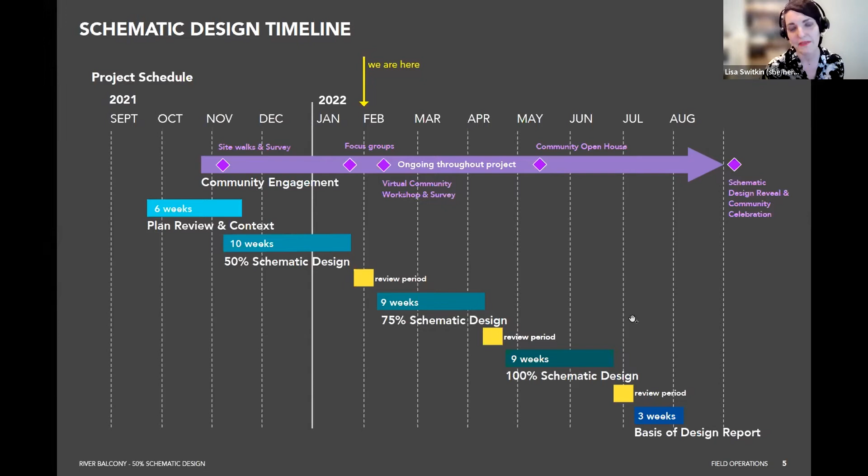In terms of outreach and engagement, which is of course essential in every project, I did want to recognize our engagement team led by 106 Group, and Regine Kennedy and her team is here tonight. Claim Our Space, Katie Battistroyer and her team as well. Katie's also here tonight, you will see her a little bit later.

Forecast Public Art with Jen Krava and her team. And we're also working with Sam Obelson, who's the Great River Passage Conservancy's tribal consultant. Sam is also here tonight helping as a facilitator. Sam is actually looking at the riverfront holistically, as well as how the river balcony fits into the larger picture.

The community engagement plan, in summary, we're really trying to engage in multiple ways, formats, and forums. This includes technical advisory and stakeholder committees, and we recently hosted a series of focus groups with historically underrepresented populations, including Hmong, Somali, Black, and Latinx Hispanic communities.

We are going to have a series of community workshops. Tonight is our first one, the next one in May, and another in the early fall. We've been doing a series of surveys. The first one went out in November - some of you may have participated, so thank you for your feedback. We'll be doing a second one in the coming days, and part of the breakout groups tonight is actually kind of taking that second survey.

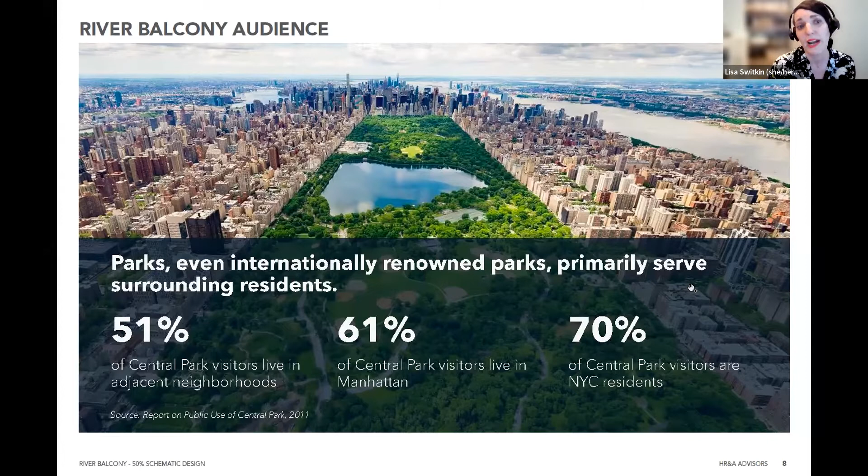The first finding is that parks, even the ones thought of as iconic tourist destinations, primarily serve their residents - the adjacent neighborhoods and the wider cities and metros they serve. Most parks don't have the resources to collect this data, but even Central Park shows over half of visitors are from adjacent neighborhoods, with much of the rest being New York City residents. So first and foremost, parks serve residents.

The next piece is some initial demographics about the analysis of St. Paul and what this means for St. Paul. St. Paul is growing, attracting a highly educated younger population, but also families, older adults, as well as immigrants.

HR&A looked at 3 areas within the downtown area: the downtown core, with an increasing number of families who tend to be white, relatively affluent and well-educated, as well as diverse communities surrounding the core. To the north, there's a growing number of African-American and East African immigrants, as well as a substantial Southeast Asian population, specifically the Hmong community. To the south, a significant population of Hispanic Latinx residents, in addition to a growing number of Asian residents.

So all of that is really to say that while local residents may be the most frequent visitors, the river balcony will also serve a diverse group across the region, as well as these adjacent neighborhoods. With initial analysis, HR&A estimates 2.9 million annual visits, the majority of whom will be local, for the river balcony. This is taken from annual number of visits from various visitor groups who shared their demographics with us, as well as benchmarked against other regional parks in the area.

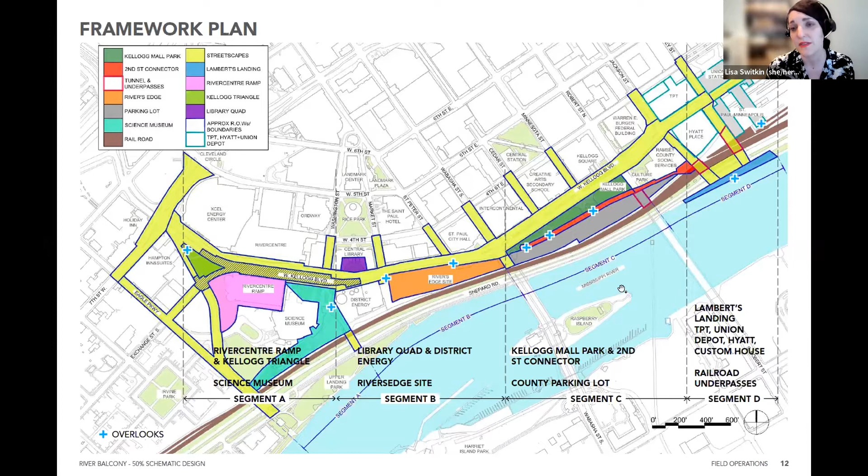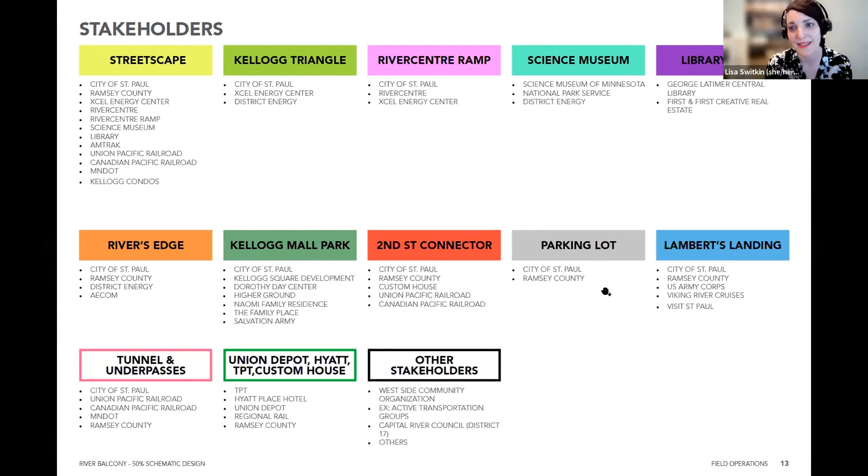So the framework plan really defines the river balcony site by identifying all of these pieces, along with the relevant stakeholders who will participate in determining the physical footprint, alignment, character, programming, and operations of the river balcony. We see this as a living document - we've tried to capture all of these different groups here. Definitely let us know if you feel like there's anyone missing who should be part of this initiative.

All of this led to a series of overarching principles. The first one is really the most fundamental one, which is build on what is already here. We were really surprised and captivated by the amount of existing infrastructure already on the site, and started to think about ways we could strategically reuse and reimagine that infrastructure, versus all of the heroics and gymnastics of trying to create new bridges and decks and things like this.

The second was establishing critical connections. This means both to the river, but also back into downtown through the city streets, those different view corridors, as well as physical connections.

To create discrete and distinctive elements. So it may not be fully continuous, the river balcony, but we want it to be recognizable, like a string of pearls, that actually become the river balcony itself.

Prolonging and extending the stay. This is really about getting people to linger and stay downtown and not just come for one thing and leave. Fostering programmatic extensions and synergies. There are a lot of really great institutions here, whether it's the Science Museum or the public library, et cetera, and really building off of the missions and the different things that all of those institutions bring to the project, and getting people downtown as they do.

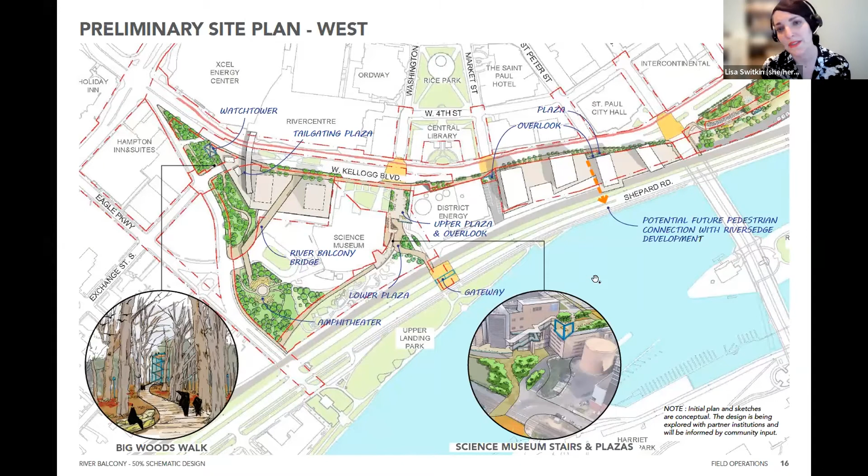The primary features include a series of overlooks, kind of like a string of pearls. They really draw you in from the city, and they're visible from the river as well. There's a series of features along the way, from the Big Woods Walk to the west, a new Bluff Walk, reimagined Kellogg Mall Park, and the 2nd Street connector as you move to the east. There's an enlivened Lambert's Landing at the water's edge all the way to the east.

So all of this is together, but it's a lot to take in as one piece. So Sanjukta is going to join now, and she will walk you through each of the spaces in more detail. Sanjukta.

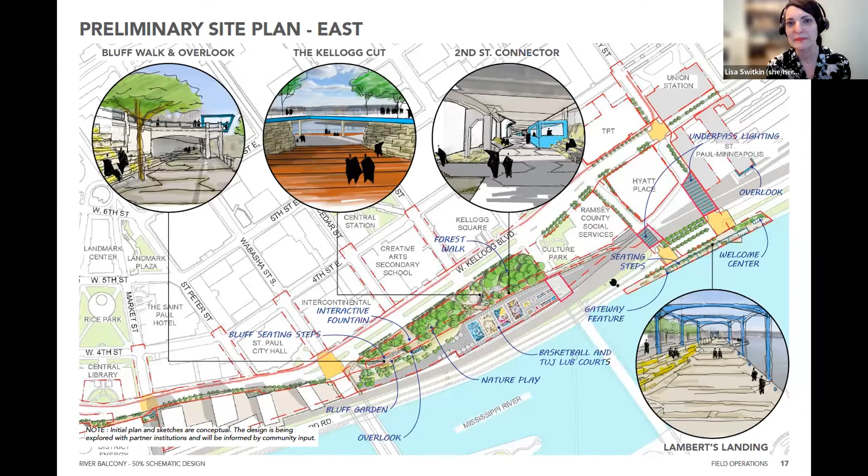All right, everyone, we'll take a little walk on this 1.5 miles. We'll do it quickly. I'm sure it'll actually take longer to walk once it's all done, but we'll try to go with this in like 10, 15 minutes.

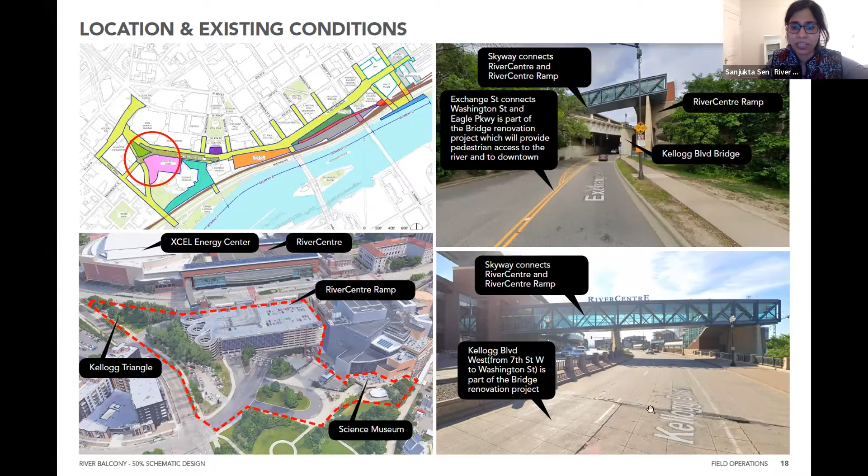As Lisa mentioned, we'll start at the western anchor of the project. This is the assemblage of sites that front the Xcel Energy Center, RiverCentre, the future RiverCentre ramp project, and also coming down topographically to the Science Museum grounds down to the river with Eagle Parkway along one edge. We really see this as an amazing opportunity to create a symbol of the Minnesota ecoregion that Lisa spoke of.

It's really one of our opportunities to create a beautiful planted environment, sort of a big woods walk that acts as a trail and leads you down from Kellogg to the Science Museum grounds, dovetailing with some of their educational and public-facing programming, such as an amphitheater, and tying into future development, which we'll coordinate on with city agencies, potentially looking at alternate ADA access from up above Kellogg down to the river, complementing other access points that are there.

These, as Lisa mentioned previously, are fairly diagrammatic. They'll move around as we coordinate with various groups. But this is really to signal an intention of bringing people down, connecting people from up above at the Kellogg Boulevard level down to the river.

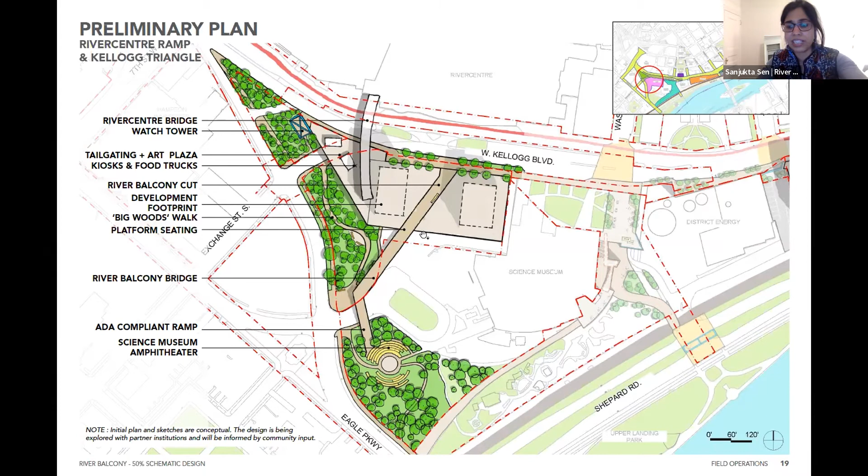At the Big Woods Walk, the idea is to complement some of the energy of the Xcel Center and RiverCentre and provide spill-out zones during game days potentially. Hopefully some of that fun can come out here, and then really bring in these ecological elements that we can start seeing here.

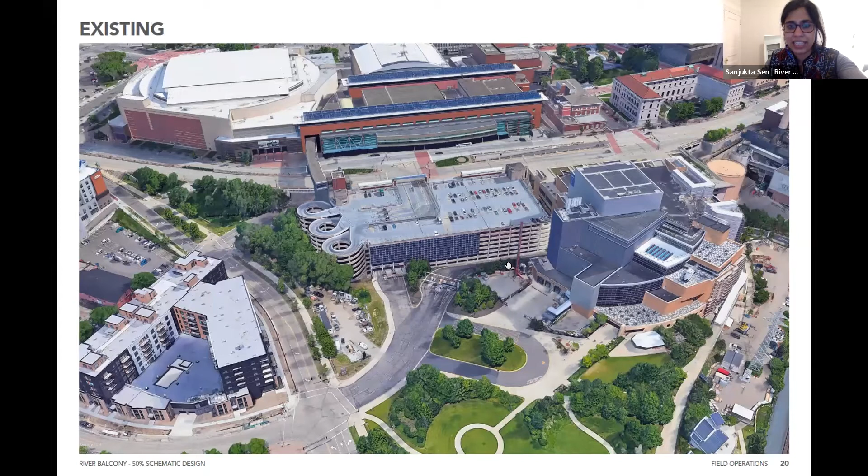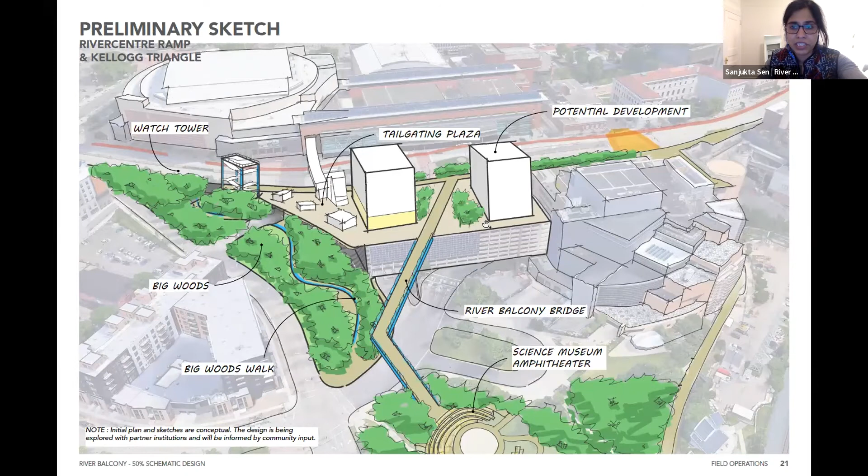This shows the existing assemblage of sites as it is today, and what it could be at a high-level massing, where you see the Big Woods Walk winding down to the Science Museum grounds, and how potential development on the site can bridge over the sites.

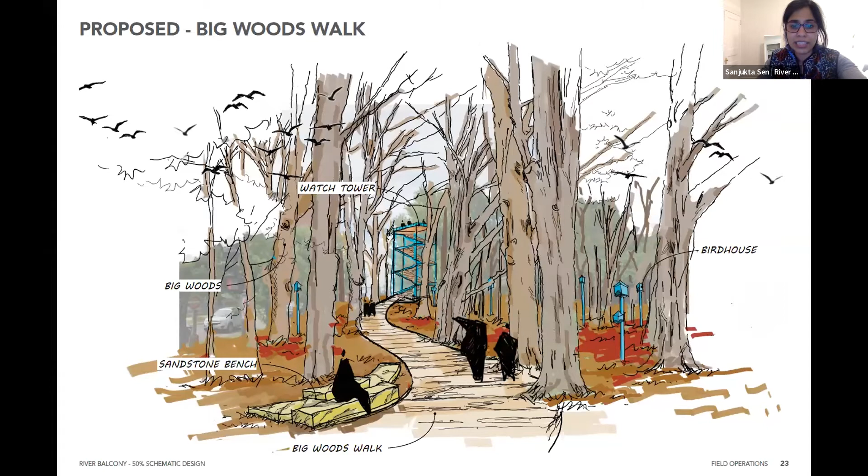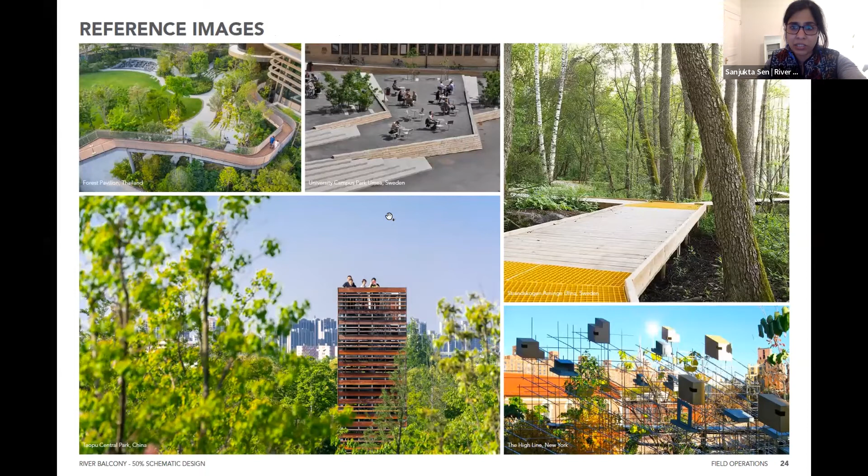Some reference images point to what these spaces and elements can be, the elements that can be integrated into the topography and some of the new development that comes along.

Moving on, walking east to the location of the Science Museum, and this interesting bridge at Washington Street that brings you all the way from the interior of the city to Rice Park, a cultural hub with the Ordway and other institutions around, with the library on its edge as well.

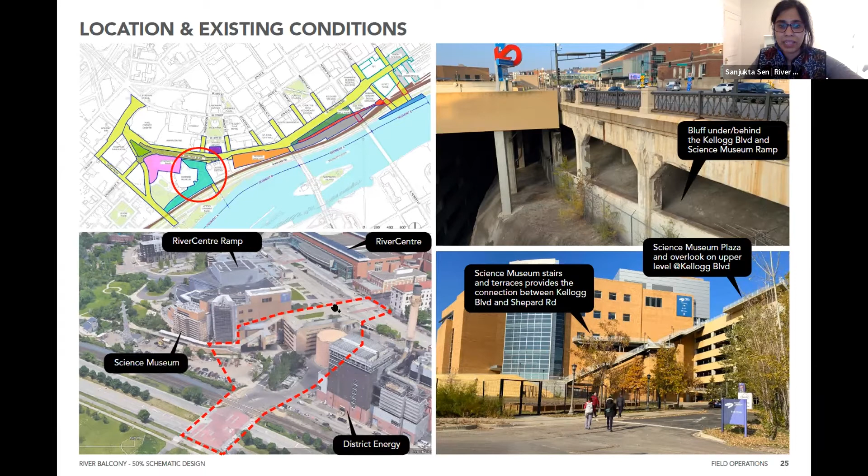We see this dashed red line as almost like a carpet that brings you down from the city above to the river. As Lisa was saying, we were struck by how many of the pieces are already there and just need emphasis to point users, pedestrians, and visitors in this area to the fact that you can easily go up and down. They just need that layer of accessibility, design, and emphasis to point you to those locations.

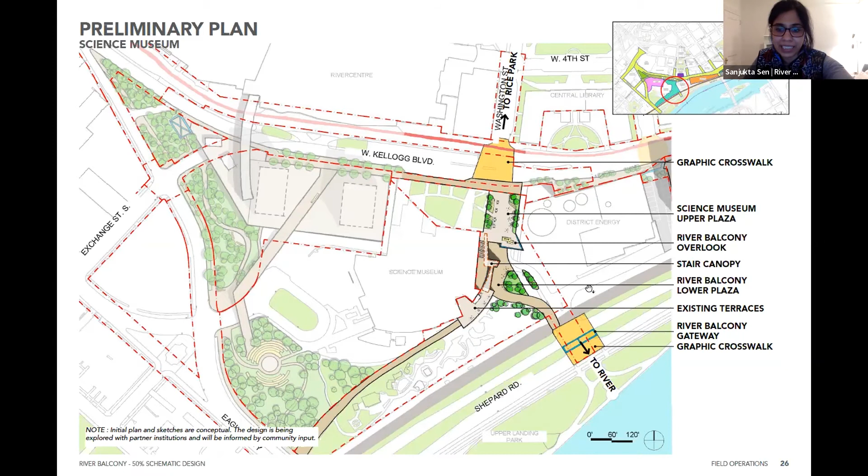This is a site plan showing how to transect that distance along Washington with an improved plaza to the Science Museum grounds. We're working closely with the folks at the museum, who have been super supportive of these ideas, looking at potentially using some of the infrastructure and tying it in as part of the river balcony identity to signal that crossover from the city to the river.

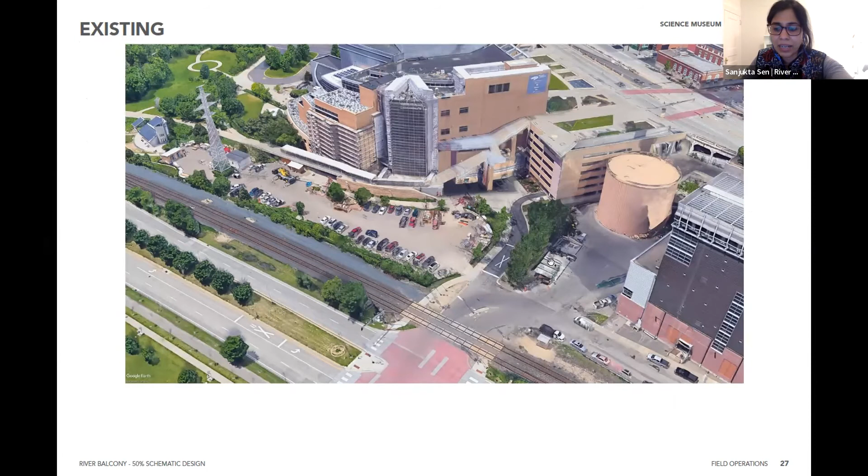Look at what exists today with this existing staircase that comes down with district energy right next to it. The transformation looks at improving some of those connections via simple tools like graphic crosswalks and legibly planted zones, really pointing people and orienting them to that connection, and also to the larger institutional presence of the Science Museum itself.

Just one thing to add - if you go back to the sketch, most of these sketches are meant to show an intention. The overlook isn't designed yet, and this idea of a river balcony gateway along Shepard isn't designed yet either. That'll happen in the next phase. But there are intentions about these different ways that could bring legibility as well as wayfinding, to allow people to know that the river balcony is there.

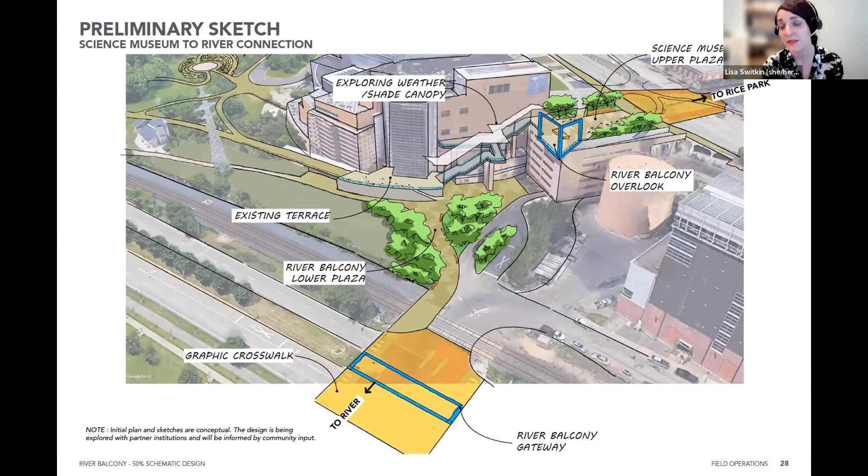In some of our discussions, this idea about Shepard and those types of gateways along the road, as well as on the bluff, also came up as something to think about and consider. Great, thanks Lisa. And then some precedent imagery about what some of these elements, such as the overlooks and the connections, could look like as they connect the upper level at Kellogg down to the river via the Science Museum.

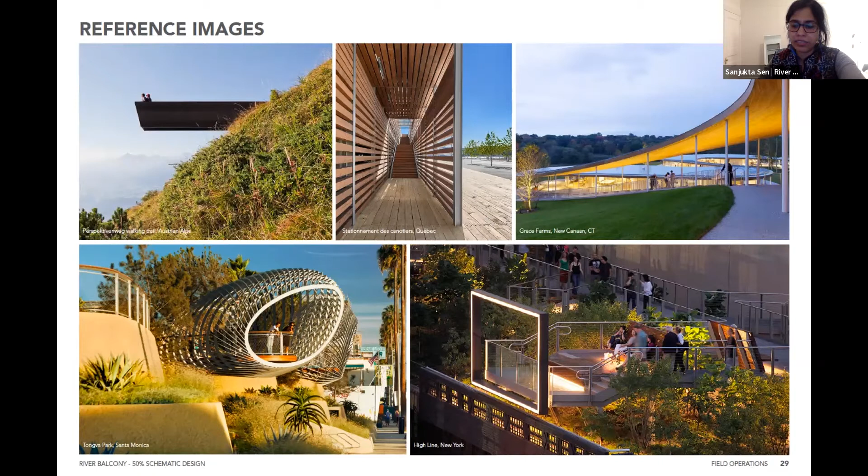Marching further east, we get to the river's edge site. Some of you might be familiar with this - it used to be the site of the old county jail, and currently it's slated for development. We are working closely with the county and with the designers to come up with potential programmatic strategies that are being thought of for the river balcony that might work themselves into how the river balcony places itself adjacent to this site.

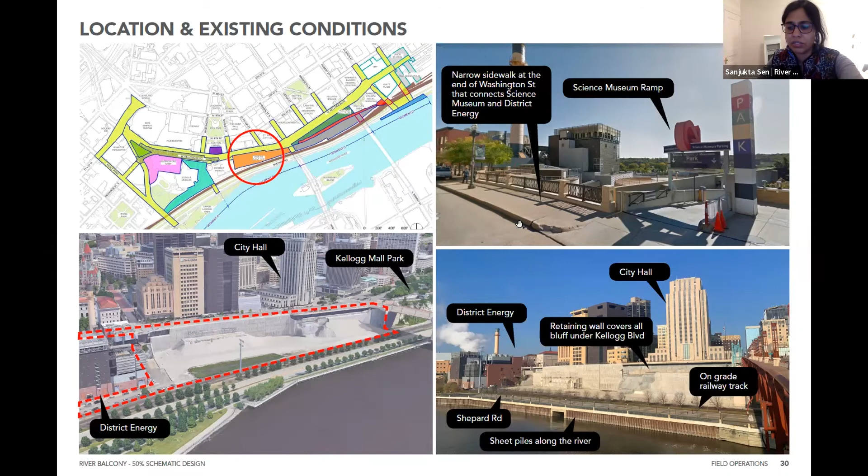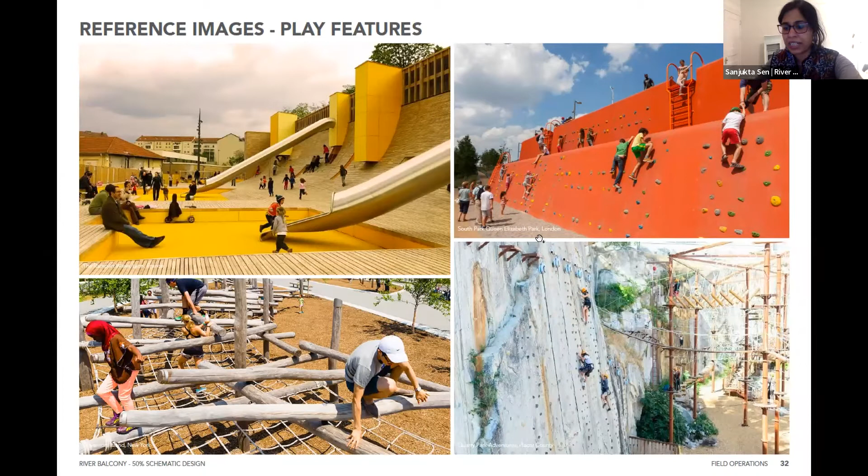Some of the potential ideas that might find a place in the future river's edge site take advantage of the location of the site and also the interesting vertical difference that the upper level and the lower level provide, and also other ideas for activation that might draw people to the site in the near and the long term.

Moving further east, we get to the heart of the site, which consists of Kellogg Park, the East Second Connector, and also the county parking lot at the lower level. We really see this as a really interesting nexus of the project for four reasons. It's possibly the last remnant of the bluff in downtown St. Paul, and therefore a really key place to continue experiencing it and appreciate its geological beauty.

Secondly, Kellogg Park itself is a really great destination. It offers awesome views of the river and across the river, and has an amazing set of mature trees that can really leverage amazing programming down below.

East 2nd Street, to us, was a really interesting space. It was almost an existing connection down from up above. That lower left image, I think, is very telling - you can kind of tell from this image what that condition is.

Even though it's currently slated for vehicular traffic, we found it to be fairly underutilized, and our hope is that we can visualize this as a pedestrian access - primarily pedestrian and bicycle access - that can connect Kellogg down to Shepard and then across to the water.

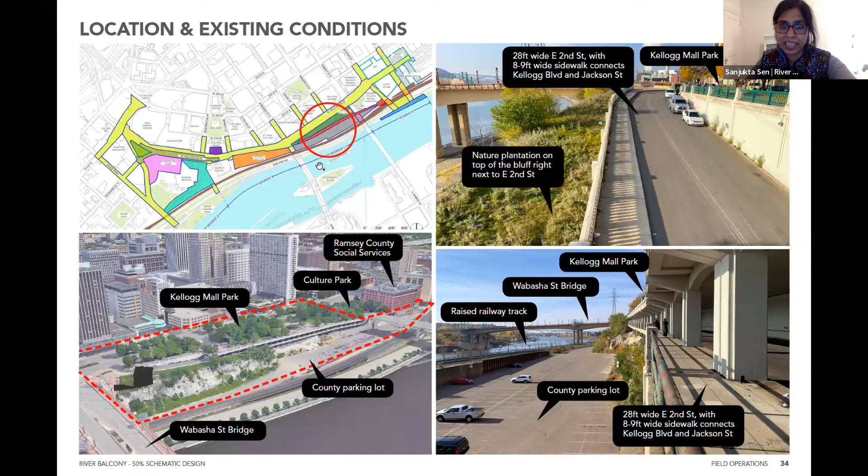The last interesting element here is that it is at the nexus of where Wabasha crosses over from across the river, making it a key point of access at the center point of the river balcony. So all of these together make this a really interesting and super key location for the river balcony itself.

A plan of the upper level of Kellogg Park uses the existing layer of trees and some of the really interesting water features that occur currently at the street ends, potentially making them interactive as a way to invite more participation in the space. And then leveraging the view at the Minnesota Street extension to emphasize that amazing vista you have at the center of this park.

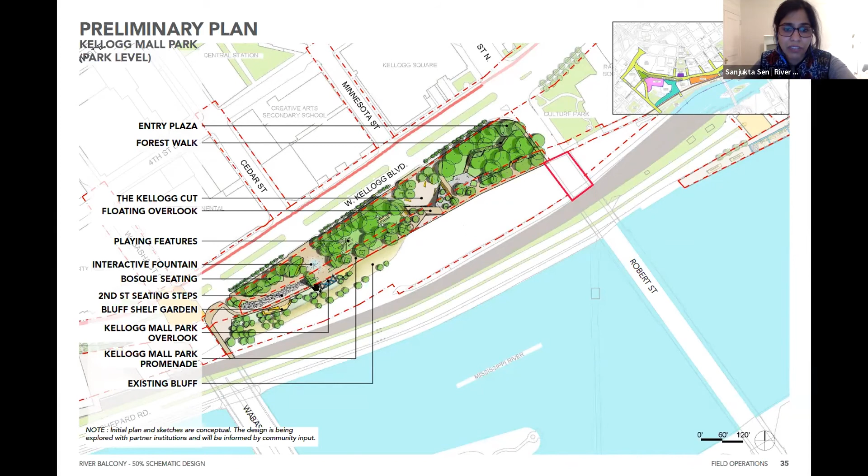At the knuckle of Wabasha Bridge, where it leads down to East 2nd, there's an idea of dissolving that harder upper level edge to create a descent down to the lower level onto the shelf of the bluff that exists there already.

This is the lower level park showing East 2nd Street. It's almost as though if you take the lid off of the street and took the park away, and we're walking down that East 2nd Street connector, we really see this as an activated second level of Kellogg Mall Park in some ways. Kellogg Mall Park is already a legible, known public space in downtown.

This could be a really amazing second level that is activated by kiosks, by installations, and potentially this idea of the bluff walk that really takes you down and helps you remember and experience the bluff at close quarters, where you can actually touch it, feel it, and be in it. It's also a really beautiful juxtaposition.

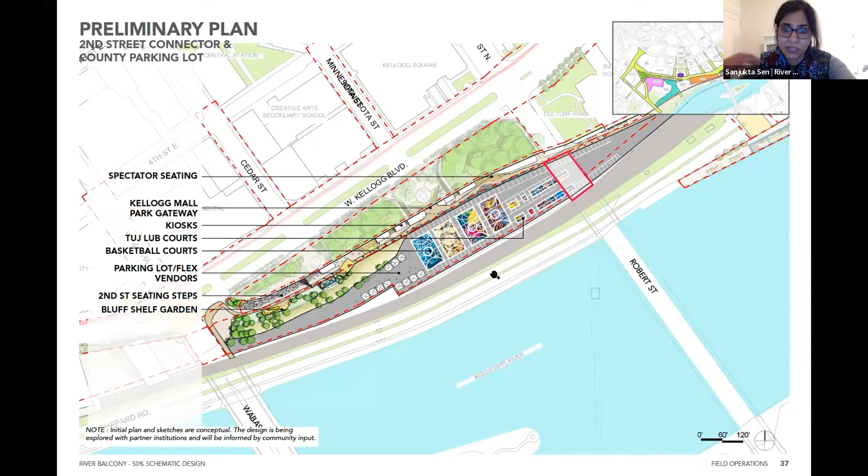As a really great way of revealing the bluff and what used to be there, the lower level, which is the parking lot, is something we see as a candidate for really interesting interim and temporary programs for weekend programming, potential courts, and specific games that are interesting for local communities.

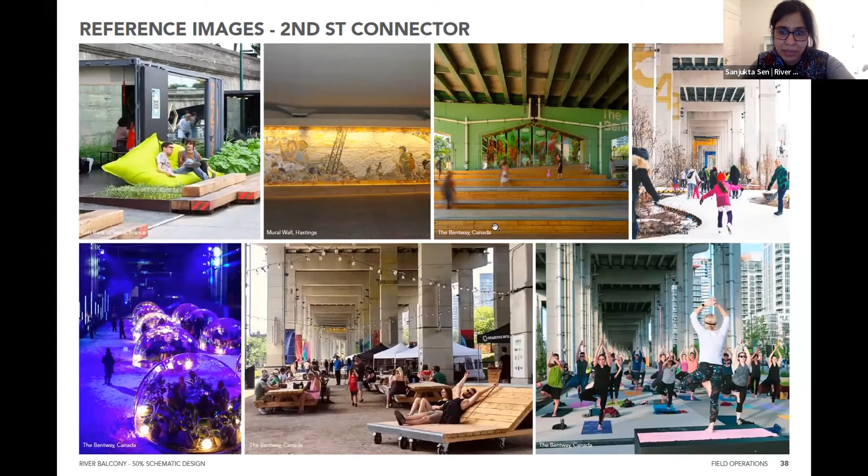Some examples of how these undercrofts and spaces are used in other cities. We are looking at these pretty closely for inspiration and precedents, along with examples of interim and temporary programming that could occur at the parking lot.

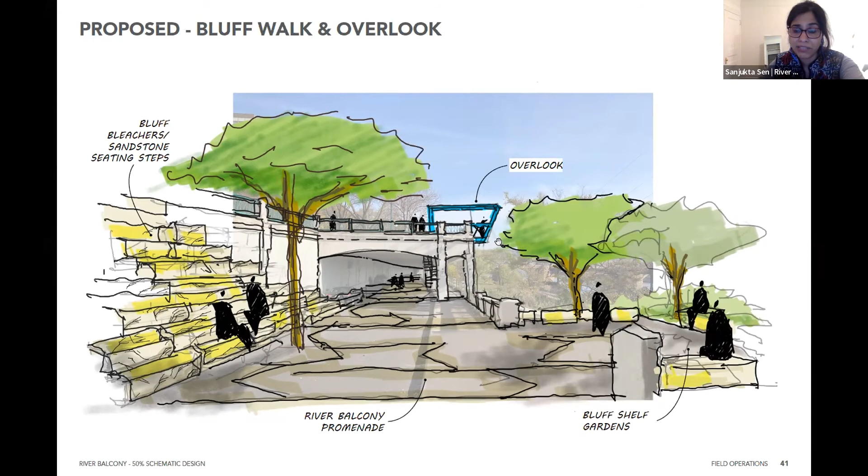These overlooks are proposed, as Lisa mentioned previously, as strategic locations to really enhance and focus the views, magnificent views out to the Mississippi. A view of what it's like to be inside East 2nd Street.

The idea is potentially bringing people down and revealing parts of the bluff, exposing parts of the bluff that might be behind this imposed infrastructure that has been carved through the bluff.

We do understand there might be some structural challenges at some of these locations. The idea is to certainly do this work selectively, by consulting with folks from Public Works and of course our very capable structural engineers.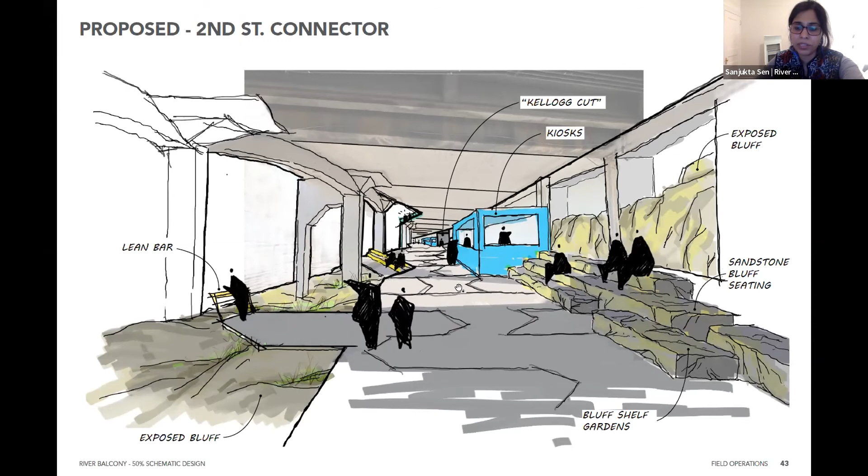But really it is to see where are the moments that we can actually see various facets of this bluff as it used to be in its former iteration.

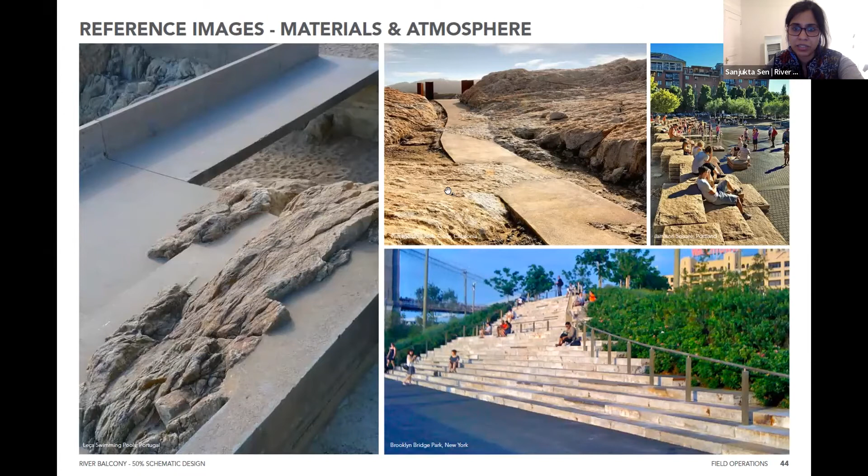Some examples of how materiality of this nature can exist together, the imposed concrete along with some of the naturally occurring stone. And then finally, the view that we are trying to really celebrate at the end of Minnesota Street by creating a cut down from the park level down to East 2nd.

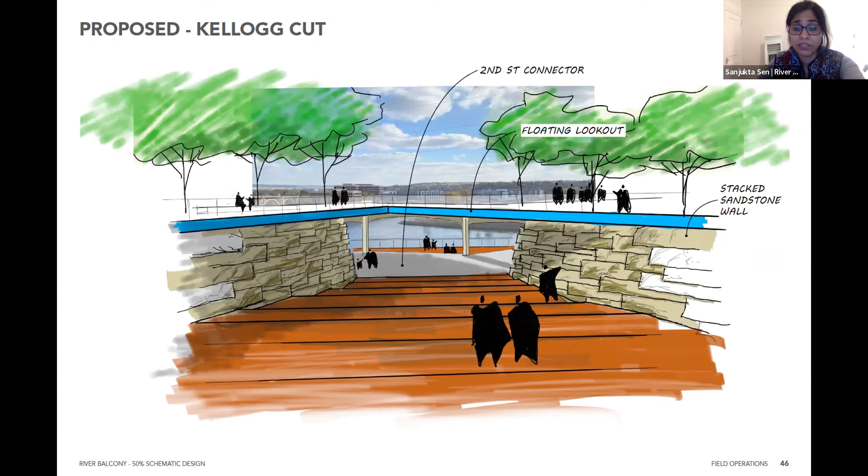And here you see an after image of maintaining that floating promenade up above, but carving our way down to East 2nd Street, not only as a means of access, but also as a way of really focusing on that amazing view.

Moving further to the east. Just in case it wasn't clear, the idea for East 2nd is to completely pedestrianize that, as well as integrate ideally a bike lane, to create a seamless pedestrian-friendly connection which is covered, which is useful especially in the winter and cold months, but to totally revitalize it and reimagine it.

This brings us at the end of 2nd Street down to the eastern anchor of the project, which we see as a collection of institutions and sites all the way up from Union Depot, TPT, and Custom House within the city, down through the railroad underpasses to Lambert's Landing.

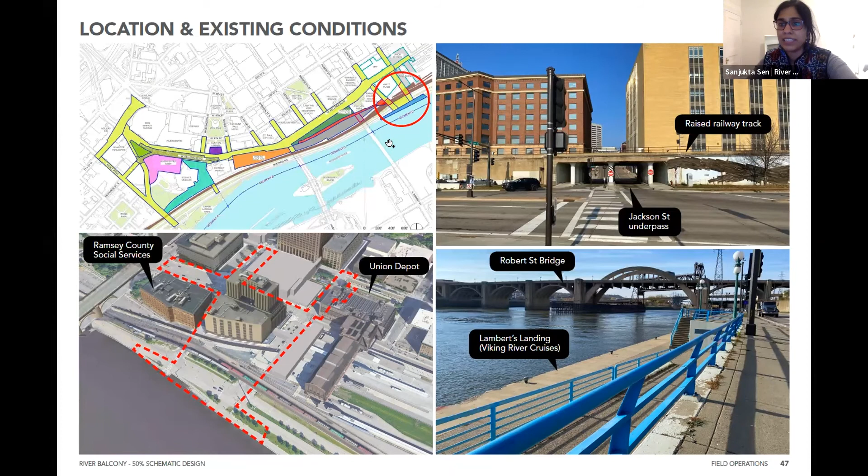This is such a key location at the eastern anchor of this project because it occurs at the confluence of two key modes of entering the city: the terrestrial railroad mode at Union Depot, and then up the river on the Mississippi through the cruise boats that would come to Lambert's Landing. Collectively they serve as a portal into St. Paul, so it's a significant site from that respect.

The idea here is to really build on some of the ideas of enhanced streetscape strategies, and looking at making the passage through these railroad underpasses safe, beautiful, and really engaging, to bring people through easily across Shepard, which can sometimes be seen as a bit of an obstacle right now, to this point at Lambert's Landing, where the river balcony really touches the Mississippi.

This is one point where we really see it physically coming down and touching the river. The site itself at Lambert's Landing is somewhat narrow, a long, narrow dock.

And we're really interested in ideas for programming it that are complementary to the cruises, of course. The Viking cruises will start operating here soon. So programming that will engage people, not only cruise goers who will land here, but also others who would like to see this as a recreational element that is an extension of the river balcony itself. And this is obviously a place where you might get somewhat the widest kind of audience and reach. You're connecting to significant transportation nodes with Union Depot, as well as on the river with Lambert's Landing. So it's a really unique moment and gateway, which is definitely needing of some love right now.

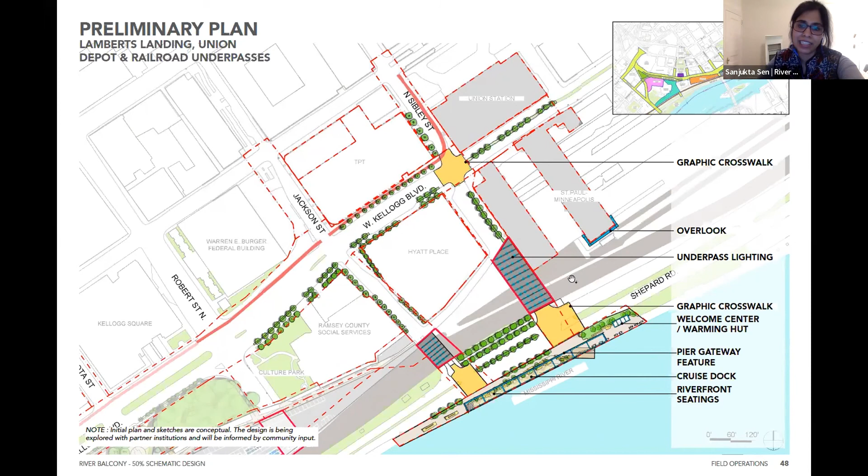Yeah, and to that end, we are trying to express that love by creating some interesting structures that make the landing visible, not just from the river but also from the city, and potentially provide concessions and amenities such as a welcome center or a warming hut where you might get a hot chocolate or a drink if you're out there. Even a river cafe, we've heard, would be a good idea. So the idea is to really activate it and create it as an attraction and a magnet at this end of the project.

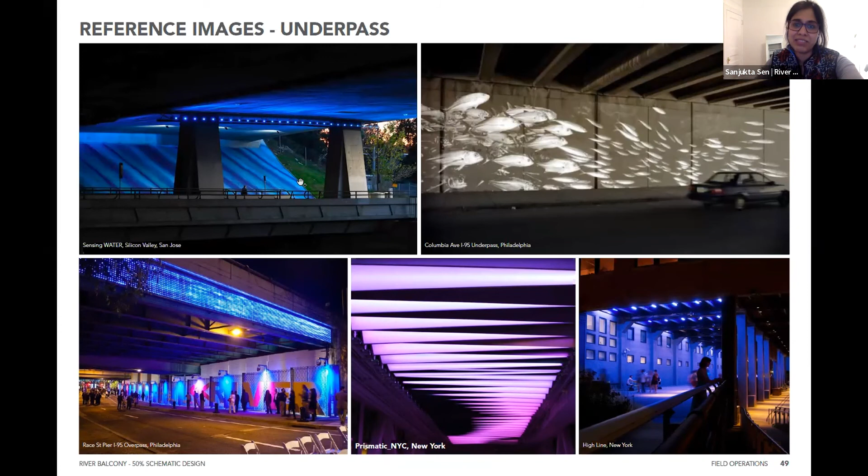Some ideas regarding what we just spoke of, regarding bringing people through safely - these are from some other projects in other cities. The idea is not to stay under those railroad passes for too long, but to really create an interesting walk through with simple measures such as art and lighting that we can install and hopefully get permitted quickly as we proceed with the project. And then really looking at how to transform this narrow dock, which has limitations in terms of its size, using the upper level and the lower level to create an interesting enclosure and a feeling of space that expresses itself as a portal to the river and back to the city.

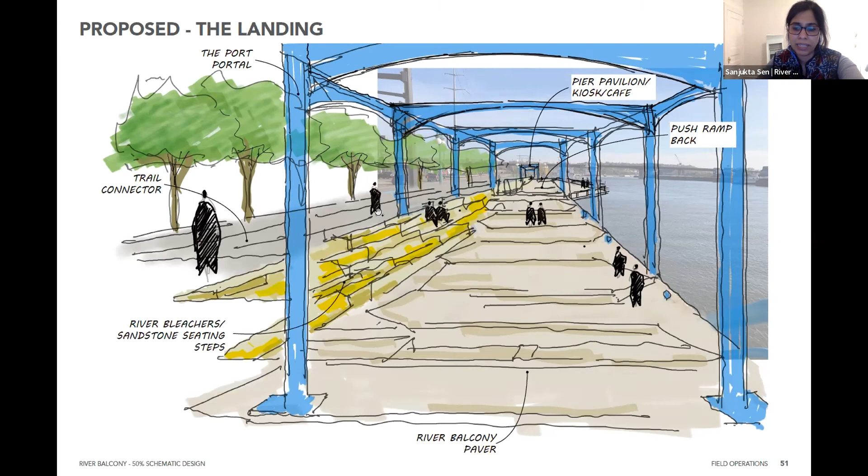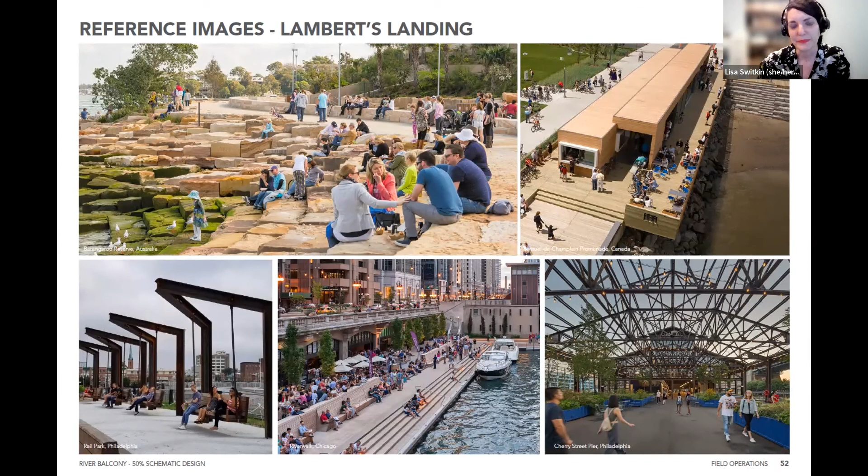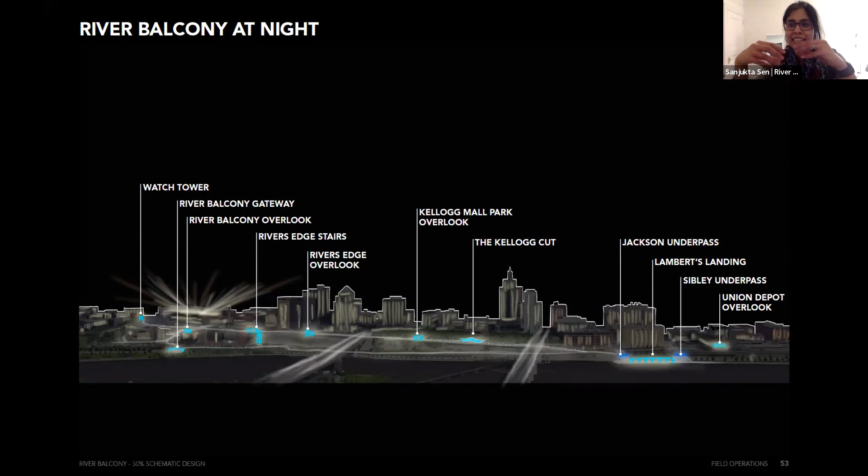And this, I believe, might be almost our last slide, but it goes back to - this was almost one of the first sketches we did, of how we imagined, to go back to some of the principles that Lisa was speaking to earlier, a set of features even that kind of string along as a set of pearls that really express the presence of the river balcony as an experience that you can connect the dots along in some ways. And while it might not always be the same exact experience in all stretches, the idea is that you're able to get these cues of these elements, and there's a language of elements and experiences that really brings you through this mile and a half as an amenity and an experience.

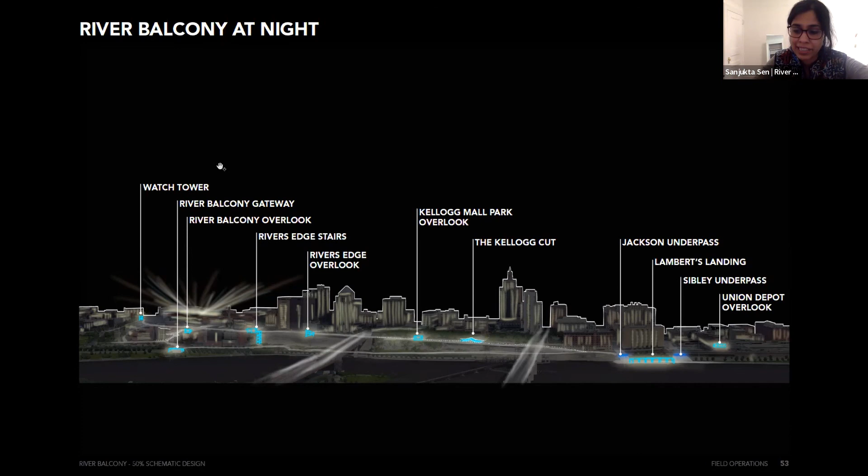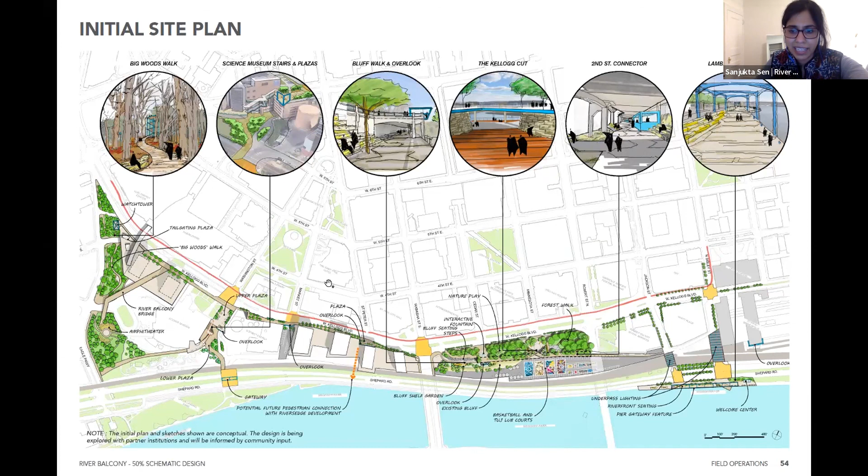So this is kind of our site plan that summarizes all the spaces and all of the features that we are proposing here. And yeah, great.

So thanks, Sanjukta. That was hopefully a very brief but informative presentation. There's obviously a lot of other work that went behind some of these initial ideas.